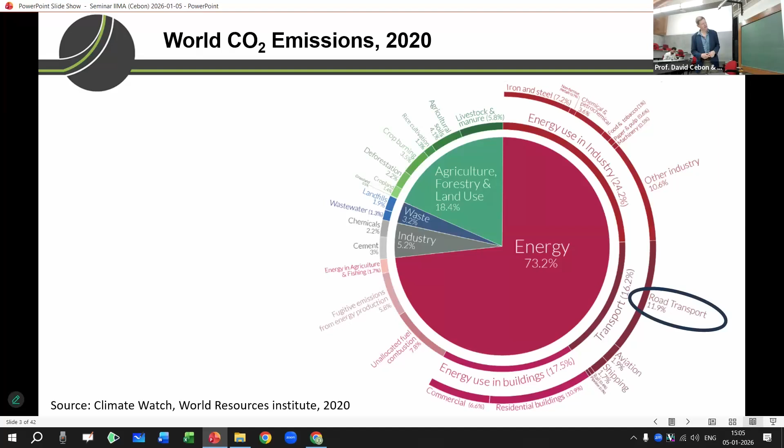Just a bit of perspective here. This is world carbon emissions in 2020. The little bit at the bottom, 11% of world carbon emissions, is road transport, and about half of that is from road freight. So emissions from road freight are about 5%. But it's increasing as other sectors decarbonise, and as the amount of economic activity in the world increases, more freight travels around; they're pretty closely correlated. So we've got an increasing amount of road freight, other sectors are decarbonising, and so we're going from 5% to maybe 10% by 2050 or more.

70 to 90% of businesses in the road freight industry are small businesses, maybe 5 trucks or less, family-owned businesses. Some are bigger, but a large proportion are small companies, and those companies have specific challenges, and particularly they have low operating margins, typically 3%, maybe 5% if they're doing very well.

And those small companies have very little resources and expertise to put into decarbonisation; their problem is survival today. It's not how do we decarbonise in 10 years' time. So it's very challenging to decarbonise the industry simply from this organisational point of view, that you've got lots and lots of very small companies that are not really interested in decarbonisation. They make up the majority of the industry, and they have limited resources. So that's a particularly challenging problem that we've got.

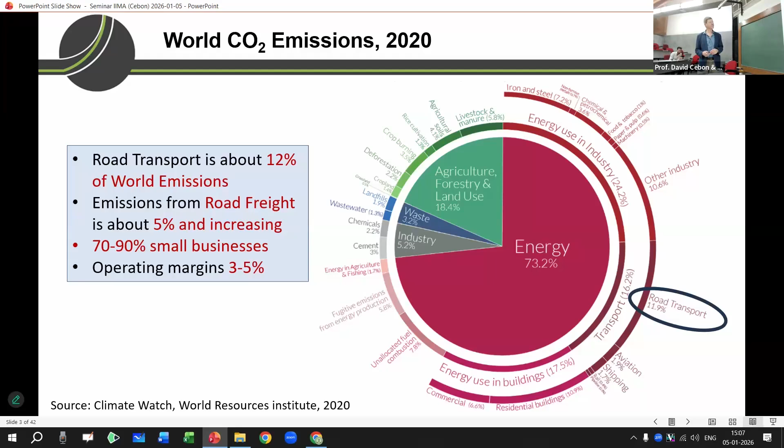So in terms of the low-hanging fruit, we can start with the easy engineering things. And we've been doing these things in the UK for some years, and some of this work happens in India as well. There's vehicle things like the aerodynamics and the tyres and making the vehicles lighter and so on. Driver performance is very important and shouldn't be underestimated. It can make a difference of maybe 15% of fuel consumption. So if you can have better drivers, you can reduce carbon emissions by 15%, which is a lot.

Higher capacity vehicles are very important in general. The bigger the vehicles are, the more payload they can carry for lower carbon emissions. There's a whole lot of logistics factors, of course, as well. And they come from things like collaboration between companies, sharing information. Logistics is very much an information industry, and by improving use of information, we can reduce empty running and reduce emissions. Relaxing time constraints, which are very important in the European context, improving vehicle fill, making sure all trucks are full as much of the time as possible.

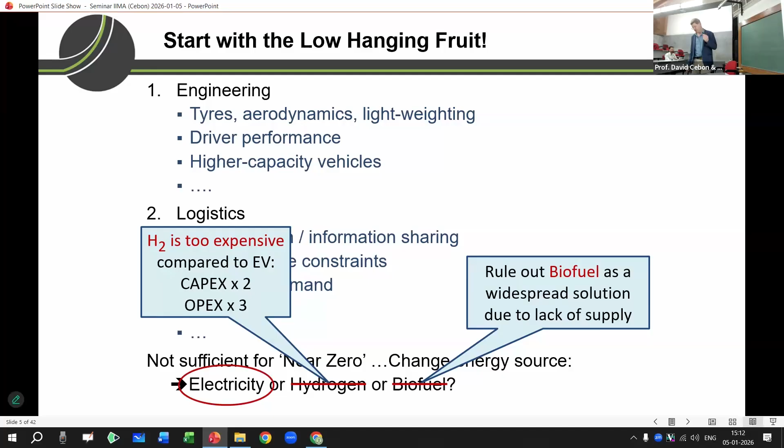So when we think about urban freight, this is a cartoon of the road network in the UK. So those roads are motorways.

On the motorways are these big blobs, which are distribution centers, large logistics facilities, which are very important, and they tend to be located near to key nodes of the motorway network. At the ends of these roads are cities, and this is very schematic, but on the edges of cities are distribution centers, large supermarkets, urban consolidation centers. They all live on the edge, or they can live on the edge of the city.

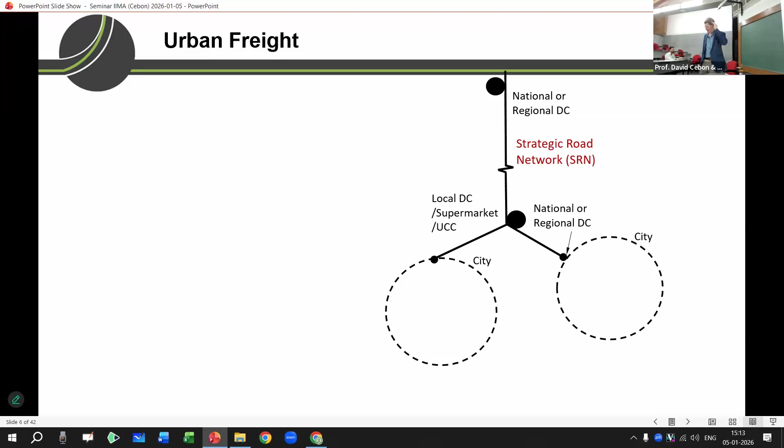And so we can, in a way, divide transport by what goes up and down the motorways and what goes into the cities. Because in the cities, you can charge vehicles overnight at hubs on the edge of town. You can do multi-drop deliveries around the town through the day, delivering parcels or delivering food to convenience stores and city centre shops. You can transport rubbish, collect rubbish, and multi-drop and drop rubbish at refuse collection points.

Now, all of this can be done by electric vehicles. It's all pretty straightforward. The vehicles can, and also buses and those kinds of passenger service vehicles as well. They can charge overnight. They can multi-drop during the day. Sometimes they can charge at charging points within the city. But overall, this is a done thing. I think the problem is solved. It's rolling out now, and it's building the technologies and supply chains for higher capacity vehicles for the future.

So we'll look back in another 10 years and this will be done, and we'll say, why did we ever have those smelly, dirty diesel trucks, noisy diesels in our city centres, making all that pollution and so on. So I think this is going to happen. I'm sure that there's elements of this happening in India now. I know there's a lot of electric buses, for example, and I suspect that this, particularly because of air quality problems, it's air quality problems which has driven this over the last 10 years. And I think you've got similar air quality problems in India, and it's quite likely that that will be a driver of this kind of change as well. So we see that happening.

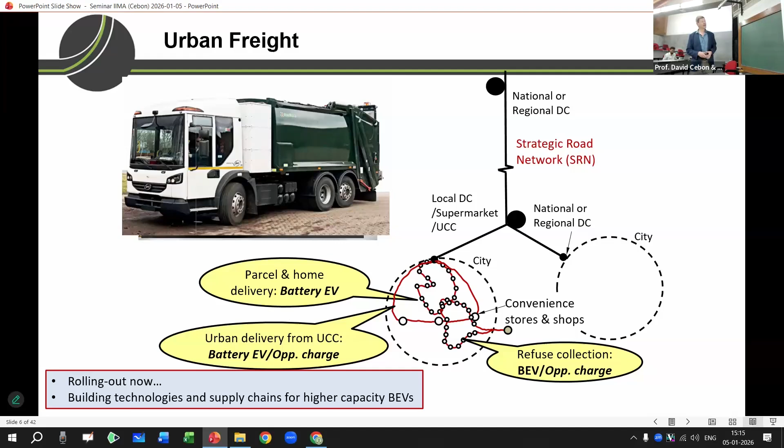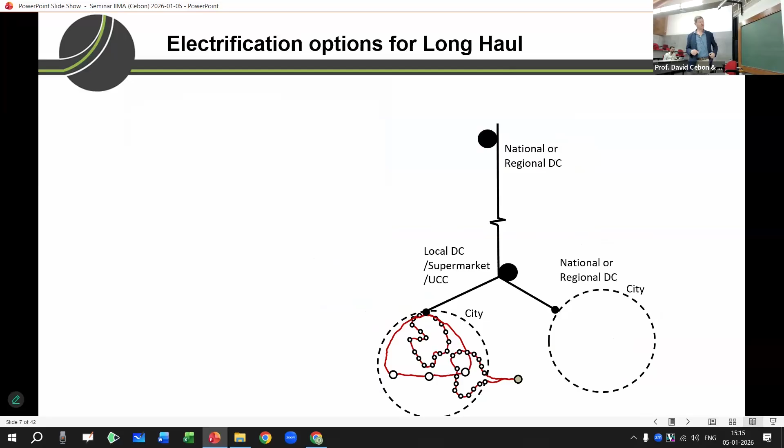It's a difficult thing to make money on. Truck drivers don't buy much coffee. They only have one driver in each one of these trucks. They take up the space of 10 cars, and they're sitting there on that piece of land for an hour. And so you have to pay for the land and the electricity and the whole facility, and you're not selling much coffee. So compared to providing diesel, which is quick and doesn't take up the land, and you don't have the throughput, this is a much more difficult thing to make work as a business model.

There's other problems with it as well, though, and one of the problems, of course, with trucking is that it needs to be very reliable. You need to be able to charge very reliably, because if you can't, then you delay the vehicles and they miss their time slot, and they have a narrow time slot, maybe an hour, when they have to arrive with their load. And if they don't get there in that hour, then they miss the time slot and they have to come back some other time, and that messes everything up.

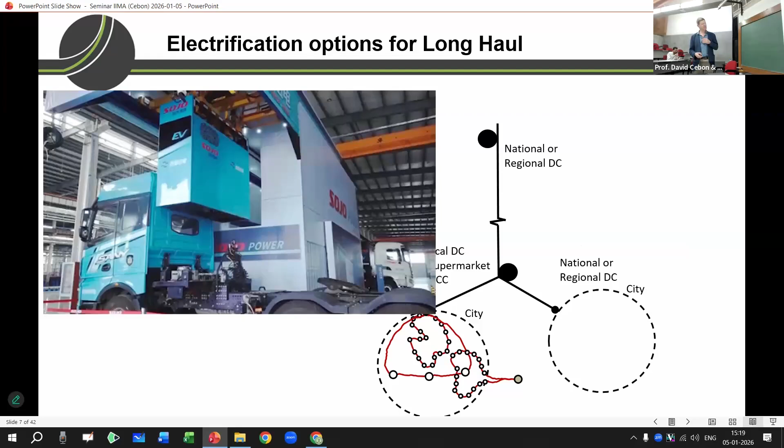These vehicles have a battery, so that when the vehicle leaves the motorway, it can drop the pantograph and drive to the distribution center with a small battery. It doesn't need a very big battery at all. So it just needs a rather lightweight mechanism on top of the vehicle and a small battery. And this is a very efficient way, and we'll talk a bit more about that.

We sometimes call this ERS, Electric Road System. ERS is an acronym that you'll hear. So, dynamic charging, electric road system. Yeah. This is another version of the same thing.

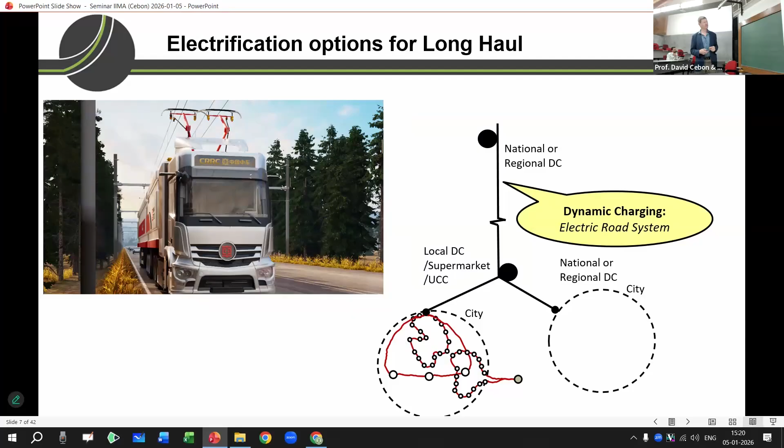An advantage of this system, of course, is that you don't have to be 5 meters tall to pick up your electricity. So if you want to charge a car or a van, then you could do it this way as well, not just trucks, and that changes the economics a bit.

So I said there are three problems with electrification, three barriers to electrification. The first two are on this slide. The first is what I call a mass penalty. So in the UK, about a third of trucks carry heavy loads. And by that, I mean they carry liquids or bulk cement or bulk food, steel or aggregate, heavy loads, right? Only a third of trucks in the UK carry those heavy loads.

The other 2/3 carry washing machines and sofas and clothes and cornflakes and potato crisps, lightweight things. So 2/3 of vehicles are volume limited, 1/3 are mass limited. For the mass limited vehicles, electric vehicles are a problem. And here's the statistics for the UK.

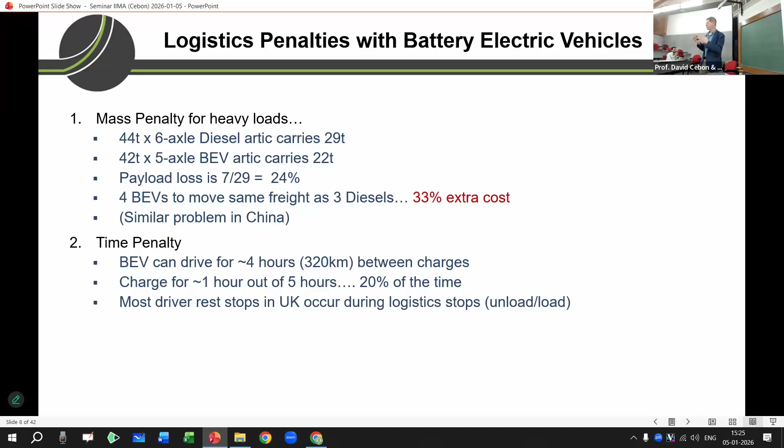So mostly, the companies arrange it so that they don't stop vehicles out in the middle of motorway services on the highway, but they've got a security problem there, of somebody tampering with the vehicle, and they've got a loss of control of what's going on. If the driver stops at that point, they're going to add another hour to their journey. So you really don't want to do that. We schedule logistics so that the stops occur during logistics stops.

So what that means is that you either have to charge the vehicle during the stops at the logistics facilities, and that means the grid connection, the electricity connection at the logistics facility, has to be substantial because you've got to charge all the trucks, right? Or you have to take an extra stop at a public charging point, which will cost 20% more because you're adding 20% to your logistics day. You've got to have 20% more vehicles to deliver the same stuff.

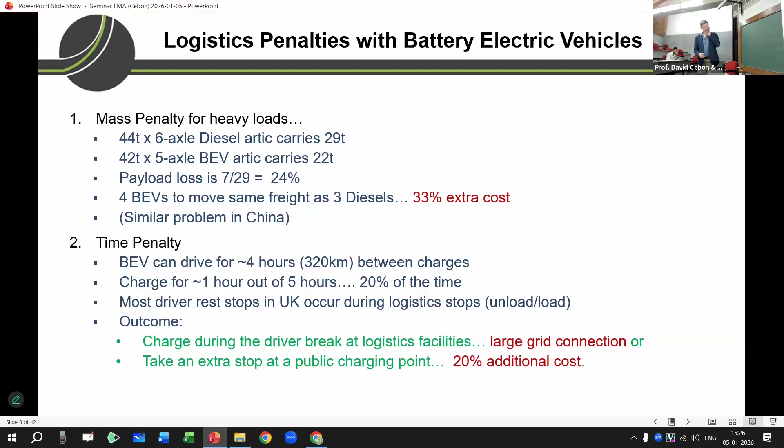So they're the problems. You're either going to have a large grid connection or you've got this time penalty of 20% additional cost. Okay, so what is the alternative? So they're the three things: the mass penalty, the time penalty, and the problem of providing charging in logistics facilities.

Now, it's interesting to think about two systems at once. We can think about the static charging system that I've been talking about. We can also think about dynamic charging at the same time because they're really the same thing. The reason that they're the same thing is this. When you have a dynamic charging system, and here is a diagram of what it might look like in the UK, then you're going to have places like up here where you've got no dynamic charging because you can only afford to put dynamic charging on roads which have got lots of trucks.

Because when you've got lots of trucks, you can sell lots of electricity and you can pay your investors back on the revenue that you're generating from electricity sales. So you can only do that if you have enough trucks on the road. If you don't have enough trucks, you can't possibly afford to put a dynamic charging system on it. So you find the most heavily trafficked roads, and these are the ones in the UK, and there are places where vehicles are going to have to go on batteries. They've got some sort of radius of activity, and they'll have to have some static charging there. And of course, there's not just one of those, there's lots of those places around the country.

And so even if you have dynamic charging, you still have to have some amount of static chargers around the country. So there's an interesting question of how much dynamic charging you have and how much static charging you have.

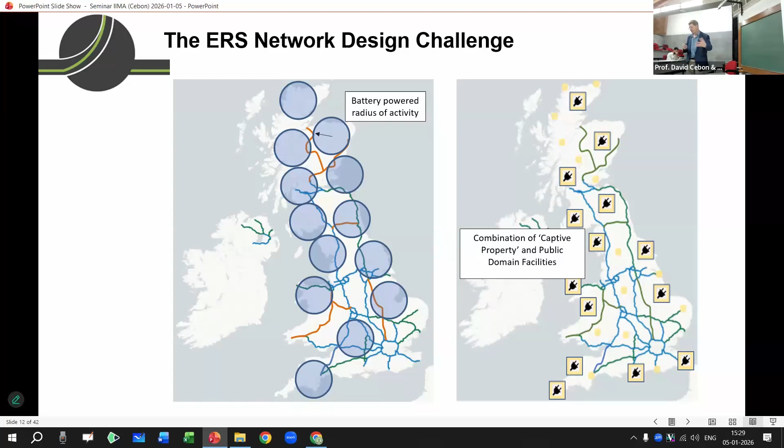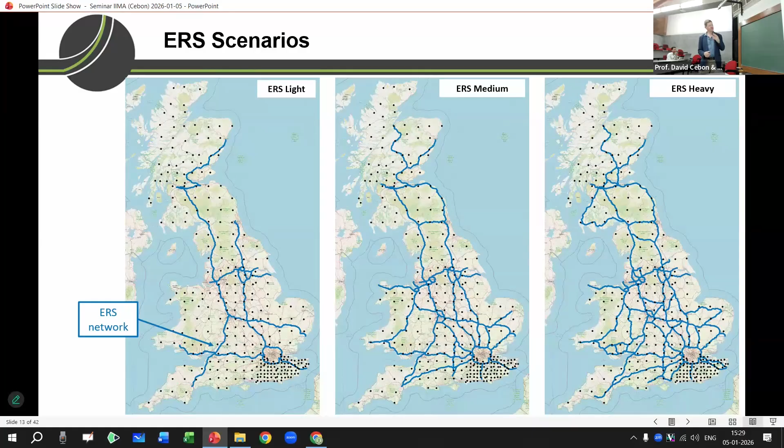So here's one way to do that. Here's three different dynamic charging systems, what we call light, medium, and heavy. This has got the smallest number of dynamic charging roads, this has got a bit more, and this has got even more, and there's static charging as well. And we can collect logistics data from our industry partners about the journeys that they're running, and we can simulate those journeys and think about what electricity would be used on such a journey.

So here is the journey. The black line is the speed profile measured with a telematics system. The red line is the elevation, going up and down hills. So this is 16 hours, two driver shifts. And then this is the battery. The battery starts off full and then it empties out. Then at this point, there's a drop off and the battery stays still while the vehicle's stationary. Then it runs out a bit more, and then it charges here at a rest stop and so on.

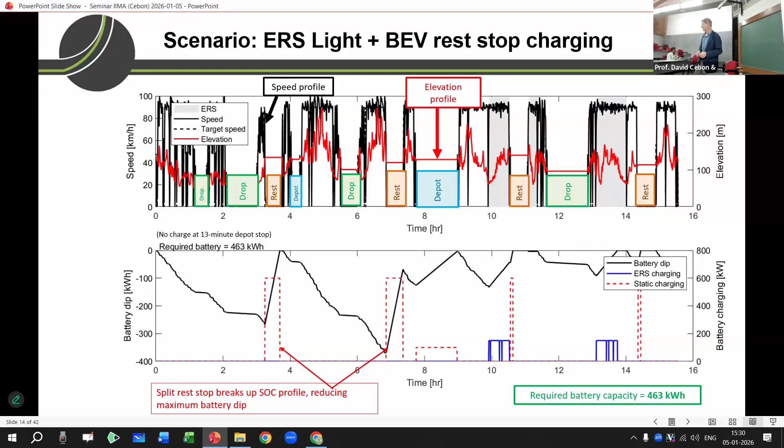And we can see here that the maximum size of this battery is about 400 kilowatt hours. That's what you'd need to do this journey. So we can look at any journey that we get from telematics data from one of our industry partners, assume a set of charging arrangements, and calculate how big a battery you would need for that journey. So when you do that, here's what you get.

So here's one journey from one of our partners, called Operator H, and this is London here, in the south of England. London has a ring road, the M25, that goes around it, and this is the top of that. The journey starts here, goes out to the west and does a drop off. Then it comes back to the depot, goes down to the south and does a drop off, comes back to the depot, then goes all the way up here, does a drop off, and comes back again. All that takes 18 hours. So this is 18 hours in the life of one truck.

And Operator H said to me, "You're talking about electric vehicles. This is what we have to do. How are you going to do that with an electric vehicle?" Okay, so let's look at the possibilities. If we charged that electric vehicle overnight in the depot at this red point here, and then wanted it to drive all day, 18 hours, then it would need a 1,666 kilowatt hour battery, 1.7 megawatt hour battery.

The biggest battery you can buy in a truck today is 600 kilowatt hours. So this is about 3 times bigger than any battery you can buy in a truck. So that's clearly not going to happen, at least not for some years until batteries are a lot better than they are today. It can't happen today.

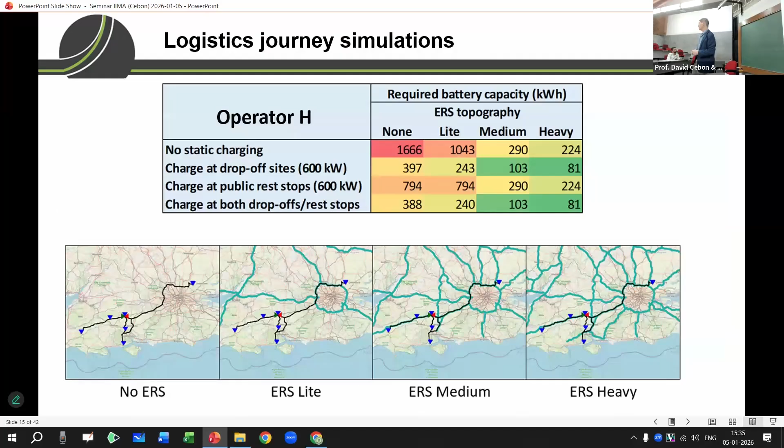And all of those 3 penalties, the time penalty, the weight penalty, and the electricity connection problem, they all go away. And I'll explain about the electricity connection problem now. The electricity connection problem is that if we're going to do this stuff, charging at these points, we've got to have a warehouse like the one I showed with lots and lots of trucks lined up, and it has to have a big enough electricity connection to power all those trucks. And that may be a very big electricity connection, really big enough to power a town. So how many of those do we really need?

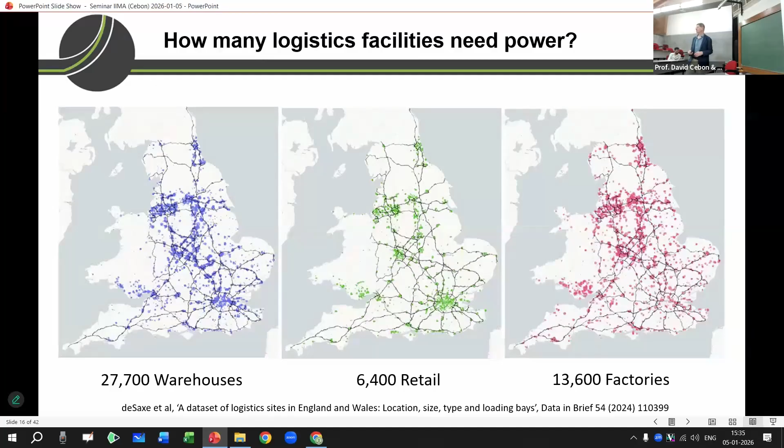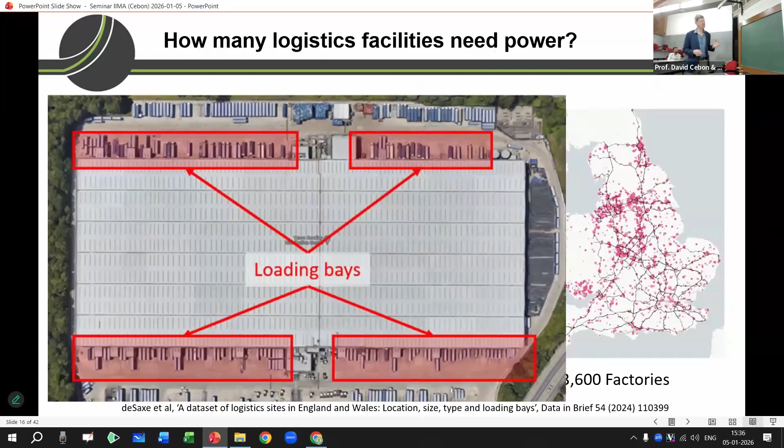And from the database of commercial properties, which is a government database, we can find out the area of this building and its GPS location. So we know how big it is, and we know its location. And we can look at similar buildings again with Google Earth, and you can count loading bays, right? We can count how many are on this. So if you go to 50 different logistics facilities or something, you can count how many loading bays they've got.

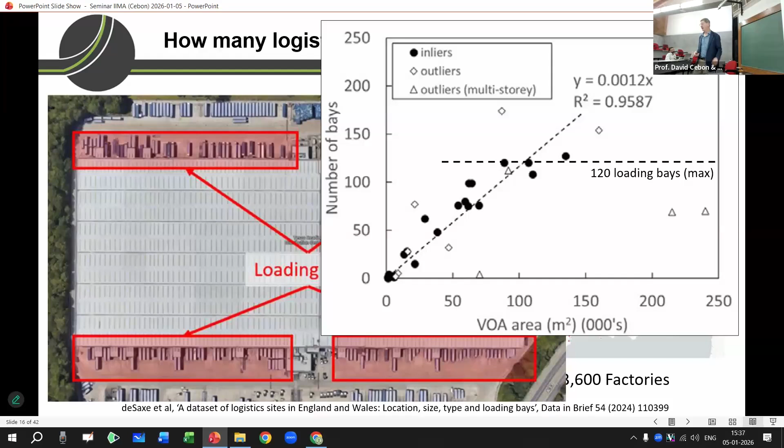Now we can make some assumptions about how much time vehicles spend charging and how much each loading bay is being used. And when you do that, our estimate is that there's about 10,000 facilities in the UK that are greater than 2,000 square metres. That's the size where we think they'll need a significant grid connection. And when you look at the electricity requirements, it's somewhere between 4 and 20 megawatts in those locations. So 10,000 locations where we need 4 to 20 megawatts.

Now, if you actually go and try and ask the electricity company for a grid connection of 20 megawatts, they'll say, don't be ridiculous, because it's such an enormous connection. You know, you can power half of Ahmedabad on 20 megawatts. But even 4 megawatts is a huge amount of electricity.

So what we're talking about here is 10,000 places around the country where the owner has got to put in a big electricity connection in order to charge trucks, and they're probably someone else's trucks. The person that owns the warehouse probably isn't the person that is driving the trucks. So out of the goodness of their hearts, some 2,000, 3,000, 5,000 different companies have got to go and spend millions of pounds to put sufficient electricity into 10,000 warehouses. This is a very big problem.

Right, there's a queue for electricity connections that's 15 years long in the UK at the moment. In some places, not 15 years long everywhere, but in some places 15 years long. So just simply putting electricity connections in to solve this problem is just enormously challenging. And I suspect it's probably just the same in India.

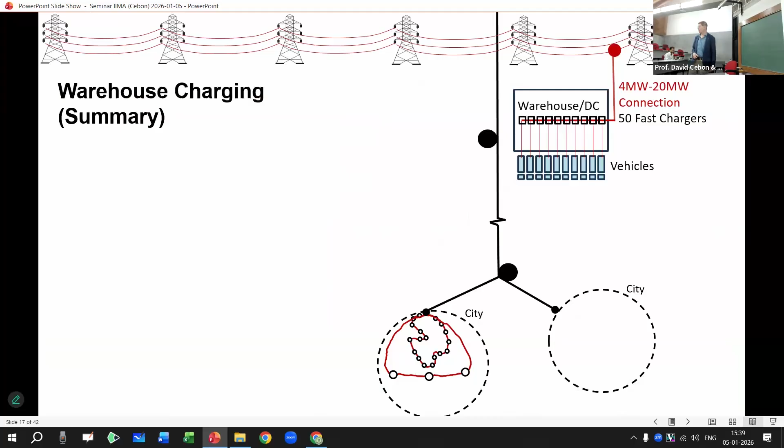So this is a summary of the warehouse charging, right? If we do warehouse charging, we've got to make a grid connection. Here's a picture of our warehouse with all the trucks lined up out the front. It's got a 4 to 20 megawatt connection, maybe 50 fast chargers in it. And every one of our warehouses has got to have a similar kind of connection, right? So there's lots of these, 10,000 of them around the country. They're not all as big, but there are many big ones.

You've got a reduced payload. You've got the mass penalty that comes with it. And you've got something between 10 and 25% more trucks as a result of the mass penalty that you are suffering there. So this is not great. It's not a great picture.

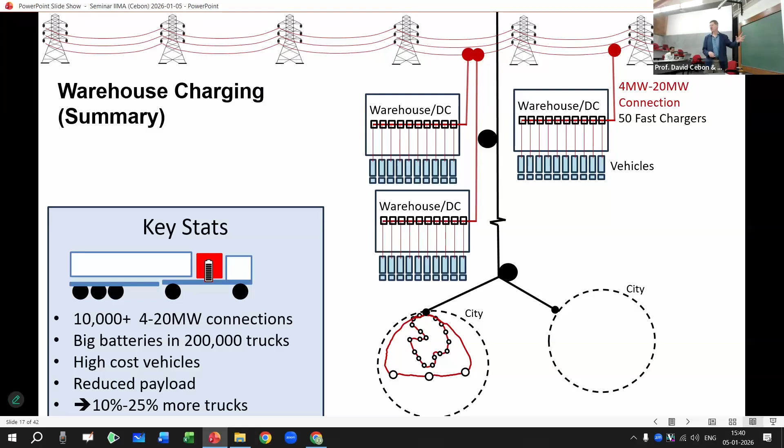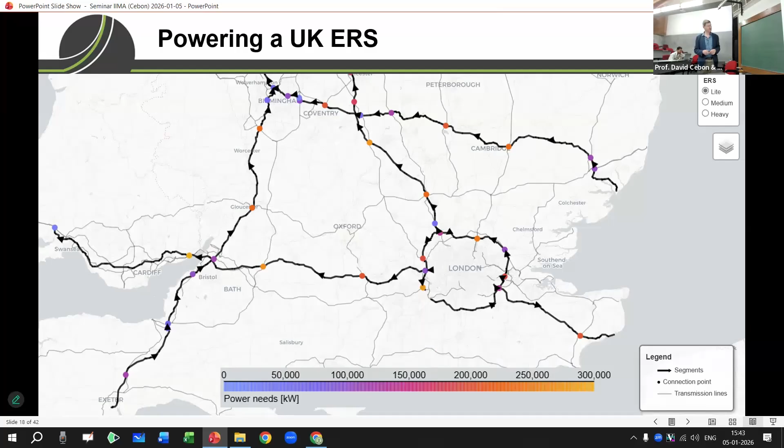So instead of 10,000 electricity connections, we need about 60, plus a small number of static charging connections. So that's a much easier problem to solve. That's a centralizable problem, and it can be solved in one go by private industry or by government. So where we end up with this is you have one big grid connection like that.

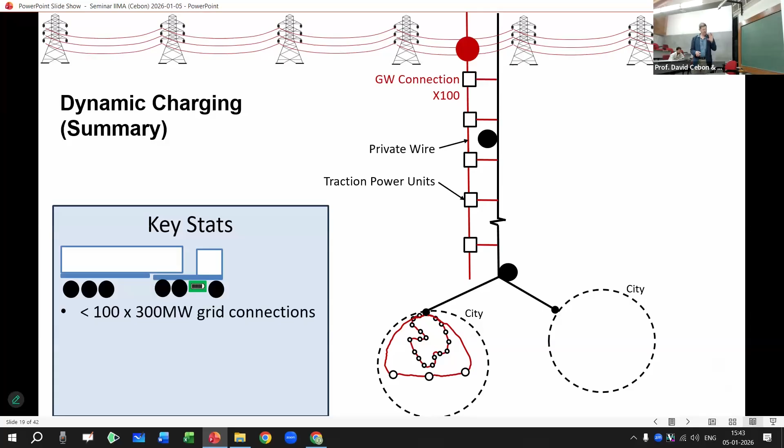There's maybe 50 or 100 of them in the country, and they power a wire which goes along the motorway, and you have these what are called traction power units which feed in to the motorway and connect to the dynamic charging system. So a much smaller number of grid connections, less than 100, of up to 300 megawatts. So they're much bigger connections, but there's a small number of them, and they're localized.

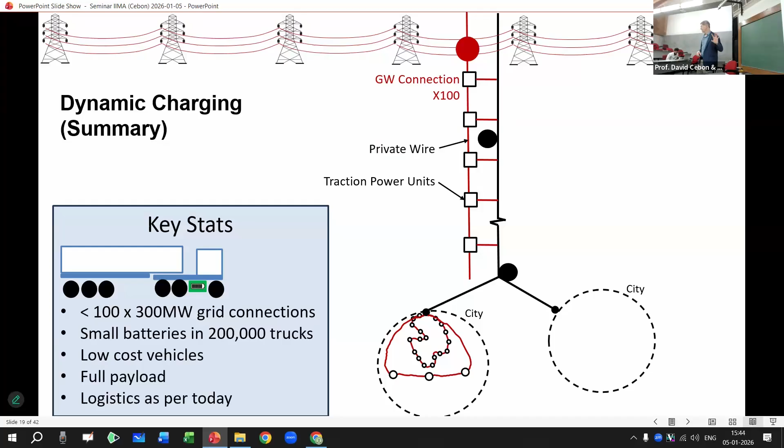You have small batteries in 200,000 trucks. So all these trucks now have small batteries. You have low-cost vehicles as a result. They can carry a full payload, so you don't have any mass penalty, you don't have any time penalty, and so you do logistics as per today. So this has everything going for it. Everything going for it as a strategy, including the cost.

And just very quickly, this is the total cost of ownership. Parth will show you some better graphics in a minute, but this is from 2030 to 2050. Total cost of ownership in the 6-year first life of the truck. So we buy a truck, we run it for 6 years, we sell it, subtract one from the other, add the energy cost, but not the driver cost. Driver cost not added, and that will be about £400,000 for a diesel truck.

So there's a diesel. We don't know what's going to happen to diesel fuel and the cost of diesel fuel in future. We're just going to assume it's constant because it might go up and it might go down. We really don't know. So that's the total cost of ownership of the diesel with time. This is a hydrogen fuel cell vehicle, which is way too expensive and will never catch up. This is a 1,200 kilowatt hour, 1.2 megawatt hour battery, probably won't catch up with diesel either. This is the rate at which we think battery costs and vehicle costs will come down.

And these are ERS vehicles. Here is a 300 kilowatt hour ERS vehicle. You can see that from 2030 onwards, it would essentially be cheaper than the diesel vehicle to run already. So importantly, if transport costs more than diesel to run, somebody has to pay for that. It can't be the logistics operator. The logistics operator's only got 5% to work with, so they're not going to pay double for the cost of logistics. So that ultimately has got to be the taxpayer, the government, the consumer. The public, either through their taxes or through some other mechanism, have to pay for this.

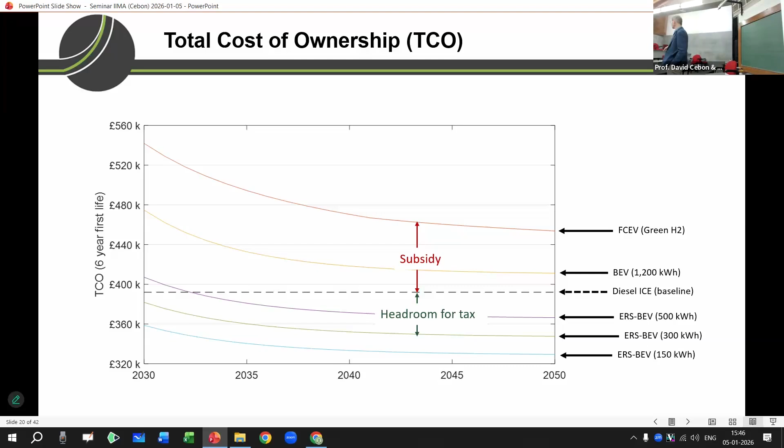Alternatively, if you can go cheaper than diesel, then that gives you a bit of headroom that you can charge a bit of tax. You can tax the heavy vehicle industry without changing their profit margin. Their profit margin is the same at this point along here. So you can collect some tax. And of course, at the moment, the UK government collects a lot of tax from diesel fuel duty. And that's going away, and they've got a bit of a problem. What are they going to do? Where are they going to get that tax from in the electric vehicle world? So because these vehicles are more efficient, they give you headroom for tax. We think they'll be cheaper than diesels to run.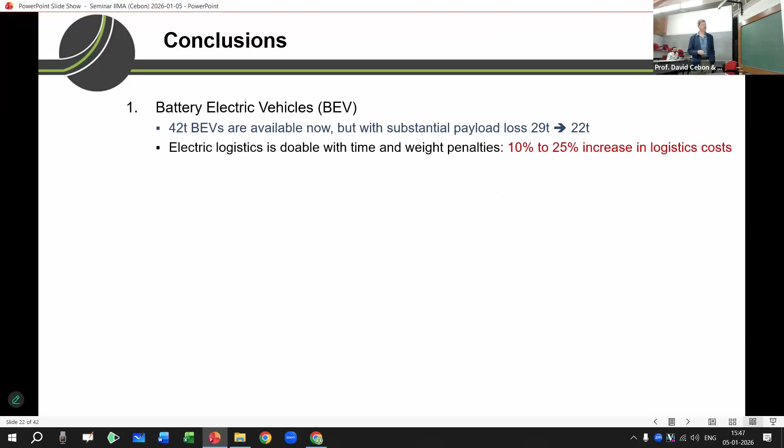Truck stop charging is necessary, but is not nearly sufficient. Our government at the moment thinks that it just puts in some truck stop chargers and that solves the problem. There's no way it will solve the problem. You need to have some. When vehicles get into trouble, they need to be able to charge somewhere, but it's not going to be the main method for charging. Warehouse charging is essential for reasonable journey costs. We will have to have charging in warehouses.

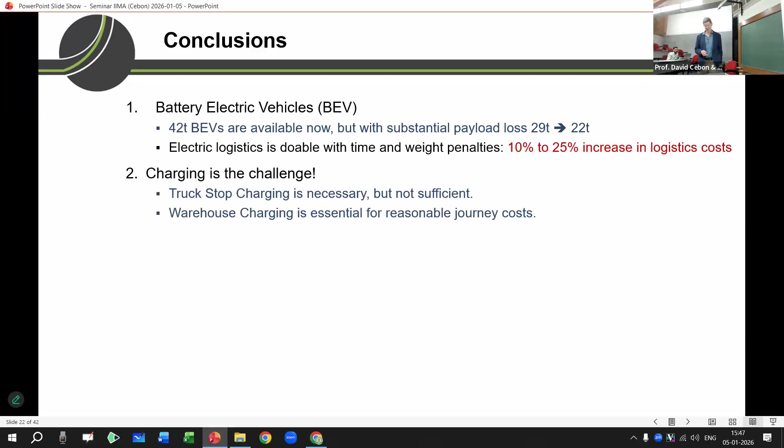You need about 10,000 electricity connections if you're just going to do static charging, if you're not going to have any dynamic charging. And that is very challenging and is a potential blocker. It potentially can stop the whole thing from happening. The combination of electric vehicles and an electric road system is the lowest cost, the lowest carbon, and the lowest weight. It reduces battery size by somewhere between a factor of 2 and 4, which is substantial. It eliminates loss of payload for mass-limited trucks, which is 60% of them in India.

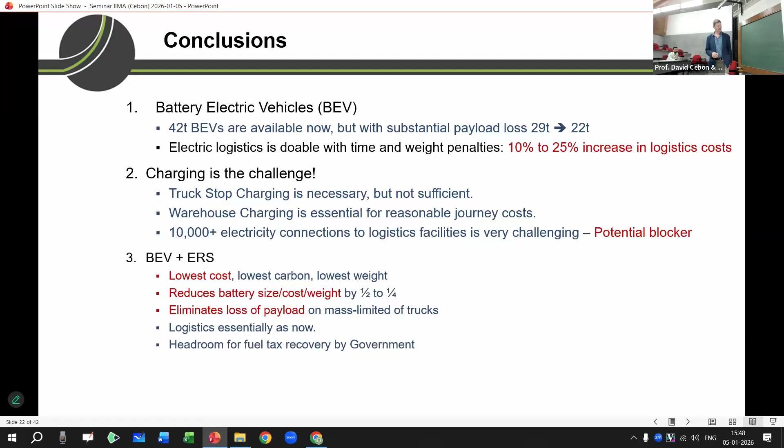Logistics is essentially as now. You don't have to worry about charging time. There's headroom for tax recovery by the government, and it eliminates most static charging and about 10,000 large grid connections. And just one final thing to say, and that is that these cost penalties must be overcome. They have to be overcome for widespread rollout of electric vehicles. If we can't get those penalties to zero, the fleet operators simply won't buy electric vehicles. They'll keep running diesels, and the electric transition won't happen.

If we want the transition to happen, these penalties, the mass penalty and the time penalty and the grid connection problem, these three problems have to be solved. Otherwise, there's no transition. So that's where I'll end up. Just one more. Solving this problem, it's not a logistics problem. It's not a vehicle technology problem. It's not an energy problem. It's all of them mixed together. If you want to tackle this problem, you have to have a multidisciplinary team with energy people, with vehicle people, and with logistics people. That's the only way to solve this problem.

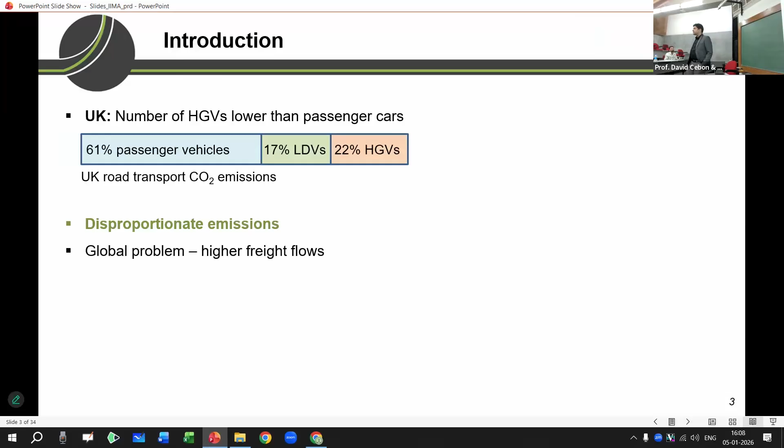And it's not just a UK problem, but a global problem. We can see that based on the growth in road freight over the years. In countries like China, India, and so on, road freight has gone up. In a few other countries, it's gone down slightly, maybe because manufacturing locations are shifting to countries like India and China.

So we need solutions that work globally, because currently there's a one-fits-all solution: everyone uses diesel trucks in all countries. We need a solution based on electrification that can solve the blockers and work globally. Is this actually possible? Well, we can only try to find out. So in this presentation we build some techno-economic models to try and answer a few of the questions, taking the blockers into consideration.

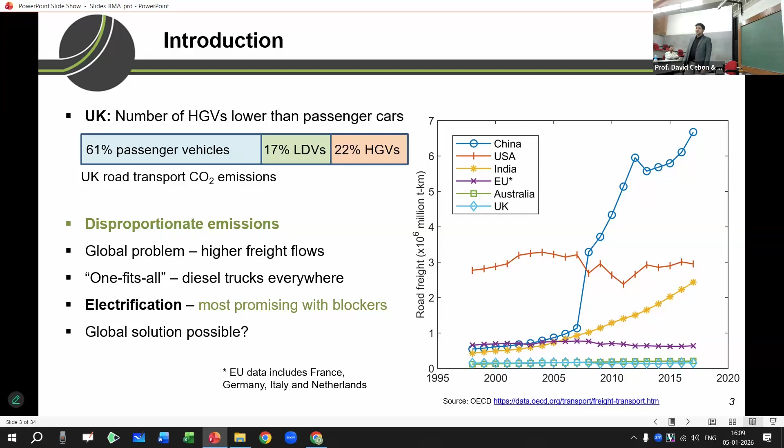So what are the blockers? Just to recap, one was the grid connections. They're expensive and complex, and there is a backlog in several countries. The other was the charging downtime penalty. We need to stop and charge, which costs money, not just in driver costs and vehicles, but also freight delays, and there may be penalties. And the third one was the payload penalty.

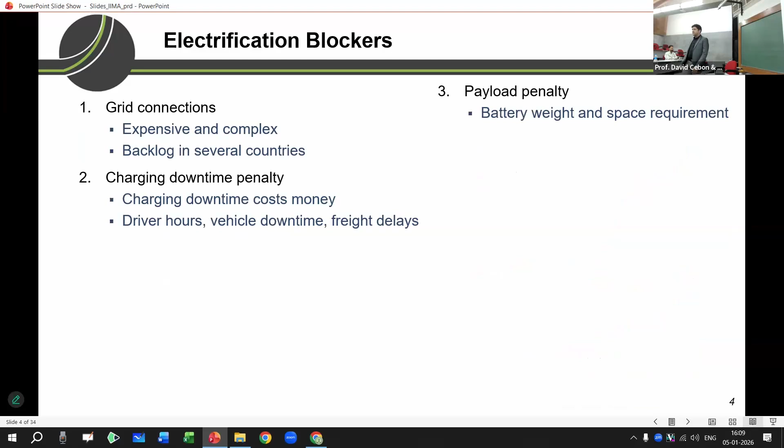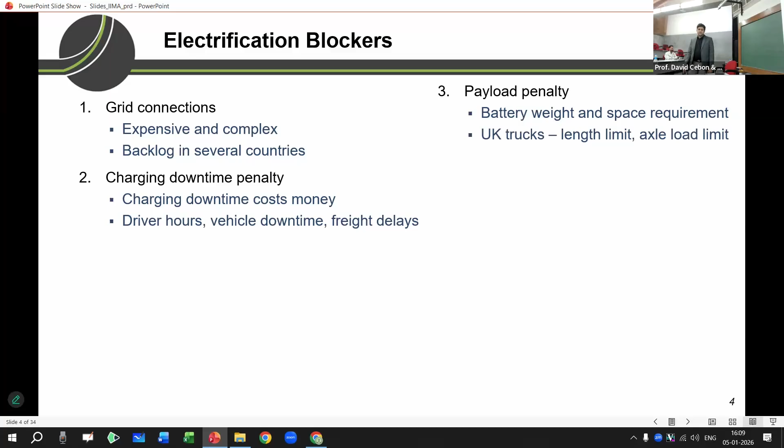As David mentioned, the batteries need some space and have a certain mass, so we have a payload capacity loss in the truck. That's because of regulations on the total length of the truck and the loading on the axles. For example, here is a standard 3-axle diesel tractor unit sold in the UK. It can carry a trailer with a payload of 29 tons.

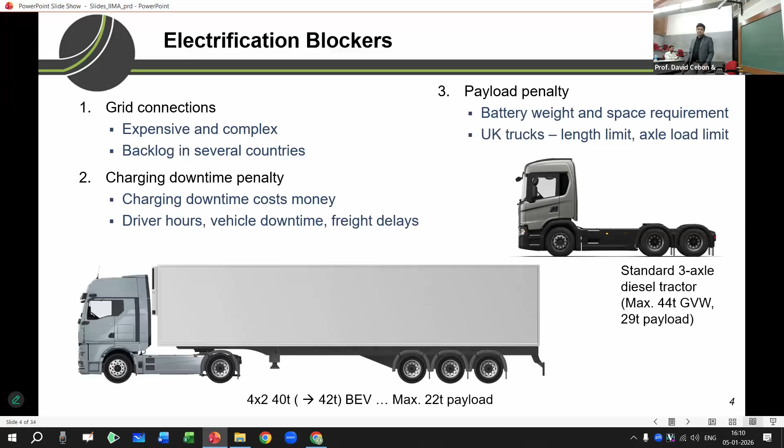Whereas a comparable battery electric vehicle can only carry 22 tons. So it's one category lower than this one because it has a missing axle. And the space that was taken up by that axle is now being taken up by the battery. So that's where the batteries are located for the electric trucks.

And also, you can't just extend these to the back and have a battery there, because the total length of the truck is limited to 16.5 meters in the UK. So there's no possibility of doing that. You're stuck with this one.

So also in terms of the options, we saw that obviously static charging has to be a primary solution. You still need chargers no matter what you do. That's similar to what David showed us, a static charging site. You need that in lots of logistics facilities. Could do battery swapping, which can save time, but it can have queuing issues, and that's something I'll discuss in a bit more detail in a bit of time.

There's also issues surrounding interoperability because when we talk to OEMs, they don't want their batteries being swapped with other OEM batteries because they maintain the secrets. You have the coolant in the battery that's specific to an OEM, they design the formula, and you don't want mixing happening. And they're expensive and complex. I'll show you some costs of these stations. They're super expensive, super complex to build.

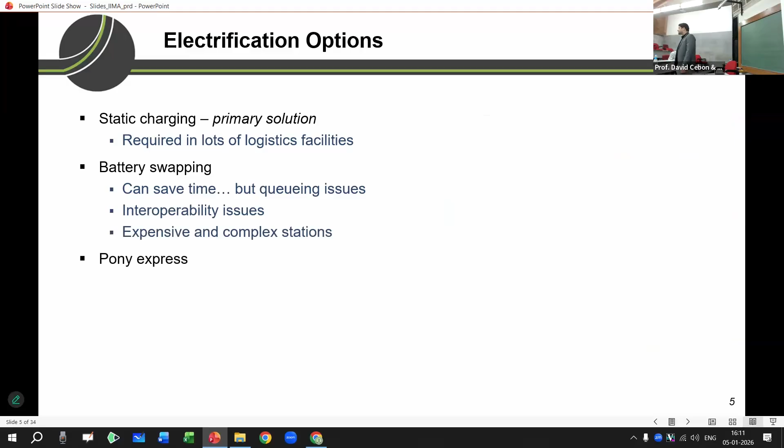There's something new here. I call it Pony Express, which is quite funny. So instead of swapping the battery, what if we just swap the entire tractor unit out? When you run out of battery, park the tractor unit, take a new one out, and then be on your way. Now, it sounds that it might be more expensive. It doesn't sound quite right, but I'll show you why it's actually better than battery swapping.

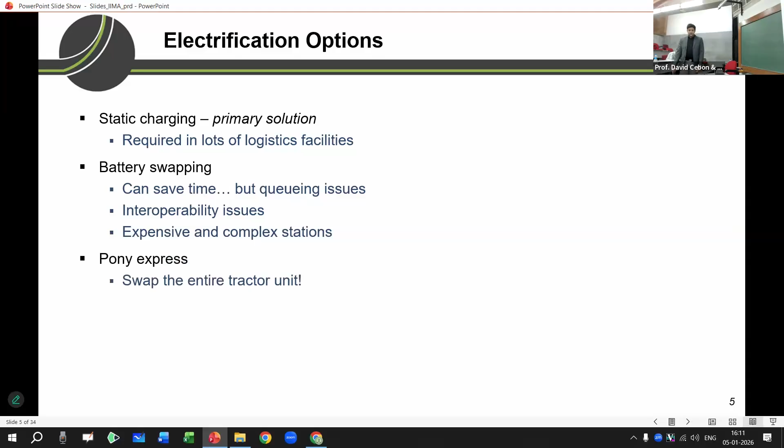And finally, electric road systems that David showed, they could be overhead ones, or they could be in-road ones, and I'll discuss those as well in a bit more detail. Of course, grid connections are a lot easier with these.

Right, so I was talking about a one-fits-all solution like diesel. Could we do something like that? There's so many different pathways that it's very hard to achieve economies of scale like we do with diesel trucks right now. So can we have a modular system that will work everywhere, and you can choose the energy source based on the requirements of logistics and so on? That's what it would look like.

The base drivetrain of the vehicle would be an electric drivetrain, and you can change the energy source based on what are the resources available. So you can have an electric drive that's powered by big batteries, and it can use static chargers or battery swapping. You can use a range extender. So what if you just remove a battery pack, add a little engine in, it becomes a hybrid vehicle, and use biofuels in cases where there's no charging available.

Or you can use electric road systems with it. You can just retrofit a pantograph or another sort of pickup and use ERS with it. So this is sort of the solution we focus on, and we try to develop models for each of these bits and compare them. To do that, there's a need to develop a simple journey model.

So obviously you have a lot of complex models. You might have studied agent-based models and the like. They're very big and complex, and it's hard to understand what's exactly going on. So we tried to develop a simple journey model to understand what is the increase in logistics time due to charging stops. So how do we quantify the charging downtime penalty?

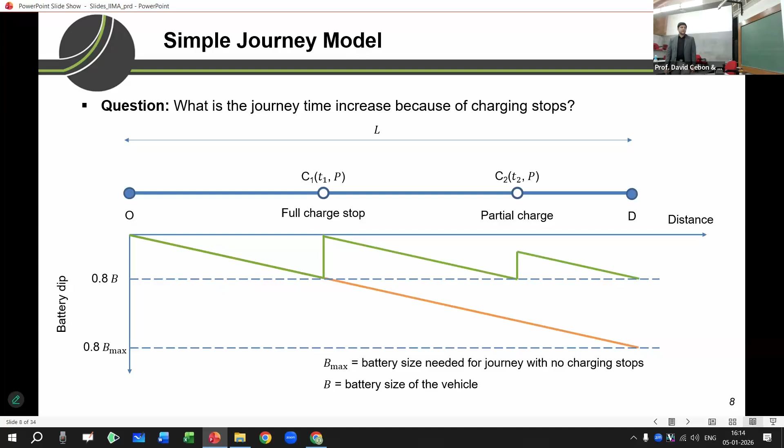They run out of battery again, and they need to add another charging stop until the last one. So in the last charging stop, you only need to charge enough to reach the destination, because otherwise you're just waiting there for no reason. And so that's the sort of model we use for calculating the time increase. Here's an example of how it works. So we call it the fundamental diagram of logistics as well.

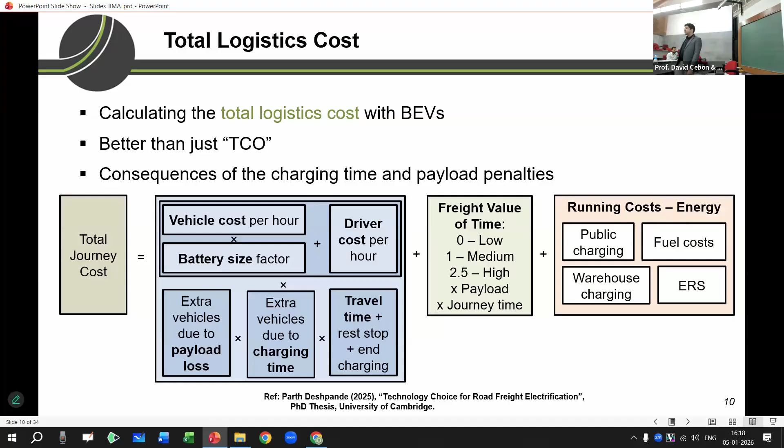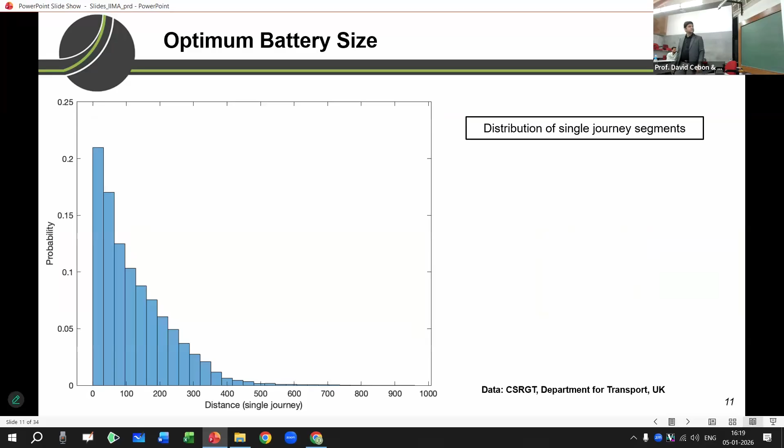How do we use it? So here's a quick example. What if we, instead of just one journey, had a distribution of journey lengths? So this is some data from the UK. We have a probability distribution of journey lengths. We can use this and run a Monte Carlo simulation to then find what is the total cost of logistics for different battery sizes. And that's what it looks like. So the x-axis is the battery size. The y-axis is the total cost. I do it per kilometer because there are journeys of different lengths.

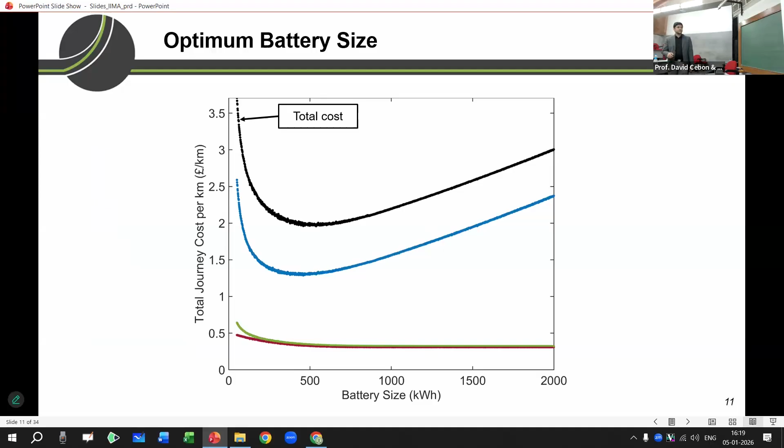That's the total cost curve added up for all these journeys. That's the components as well, just for reference. So that's the standing costs, that's the freight value of time, and the energy costs. And you see that there is an optimum there. So if you wanted a truck that could do all those journeys, what is the battery size that you would choose? Well, it's that one because that results in the lowest average cost for that sort of journeys. So this is a quick, nice and easy application of this total logistics cost.

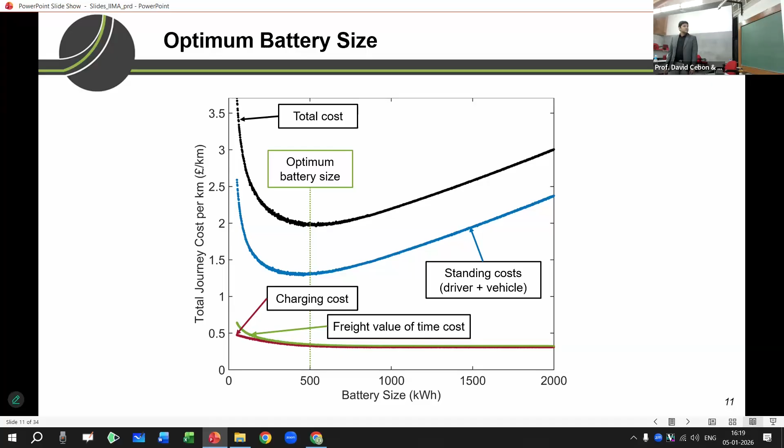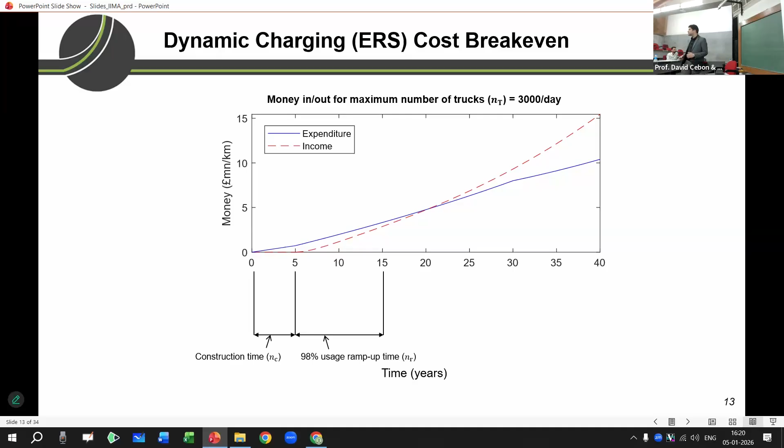We have a brief period at the start, that's 5 years, that's construction time. So during the construction time, you're installing the electric road, so there's no income, but you've started spending on it already. We assume it takes 10 years for it to reach peak usage, from no one using it to everyone using it. That's accounted for there. And then there's a commercial loan as well that we assume, and that goes off after 30 years. So this point where these two curves intersect, that's the break-even point. And that's what we focus on.

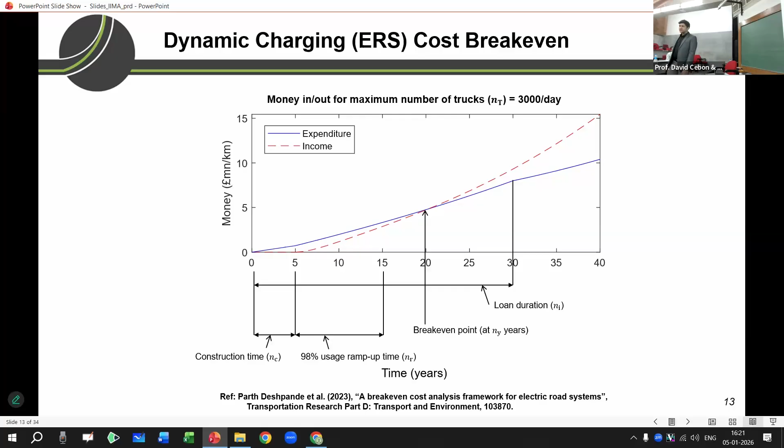We want to have returns within a certain number of years. And this is assuming that there are 3,000 trucks per day on the road. So this gives us a way to correlate the number of trucks on the road to the break-even duration and the overall economics of the electric road. So we'll use this going forward. Of course, the finance cases may be different. So I just showed you an example here, but you can vary all these parameters: the construction duration, the ramp-up duration, the break-even duration, the loan, and the interest rate.

So we have 3 different cases. Case A is the quickest return period, but it has the highest interest rate. Case B is sort of a moderate case. And when we talked with a few investors, we asked, well, would you invest in the ERS? They said, maybe. And we asked them, what would be your conditions? And they said, case B. So that's the more realistic one. Case C is the more relaxed one. So it takes you a long time to get your money back, but lower interest rates. So we'll be using these throughout the presentation for all the results. But what we can do using these is try and correlate the economics of the electric roads with the economics of the vehicle.

So I showed you 2 things. I showed you the total logistics cost, that is from the perspective of the vehicle. And I showed you the cost break-even model for the ERS, that's from the perspective of the infrastructure. Now, how do we link those?

So first, we need to make some assumptions. I assume that we use an ERS vehicle that has a 250 kilowatt-hour battery. 80% of the journey is on the ERS. So there's 10% at the start and 10% at the end that's not on the ERS. We assume that the payload requirement, the demand, is 29 tons, so that we are looking at the worst case scenario, like what if you want to carry a mass limited payload.

And the ERS sizing depends on demand. So it depends on the traffic flow. If you don't have many vehicles using it, you'll put in a smaller substation. Otherwise, you'll put a larger substation. And we include all the standing costs as well.

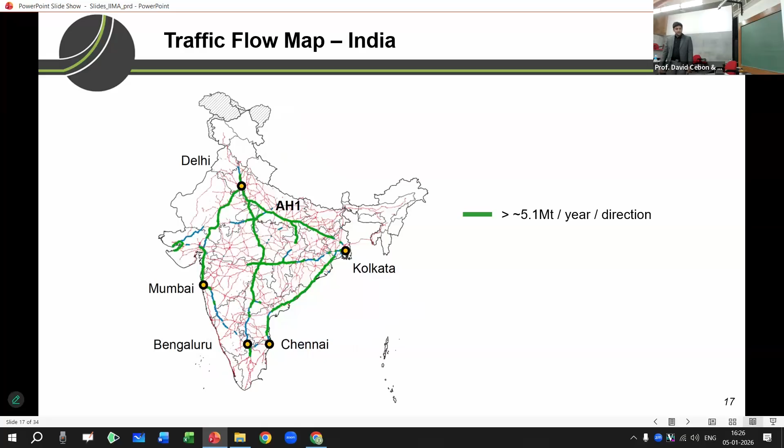Right. What if we can't have ERS? So what if we don't have more than 3,000 trucks per day on the road and we need to use static chargers? What are our options? So yeah, I'll be comparing some of these options.

Now to do that, we need to be careful in accounting for the cost of infrastructure. We think it's easy because, well, it's just the cost of one charging unit. There's two other things that are key that we try to incorporate. One is the cost of land. And to do this, I used an approach similar to the one David showed us for the warehouse, for counting the number of bays.

And if we do that, we get a nice correlation between the cost of land and the number of charging spots, and we can use that to do our calculations. The other important thing is the cost of grid connections, which are super expensive. So we used a couple of different sources for that, and we developed a model for that.

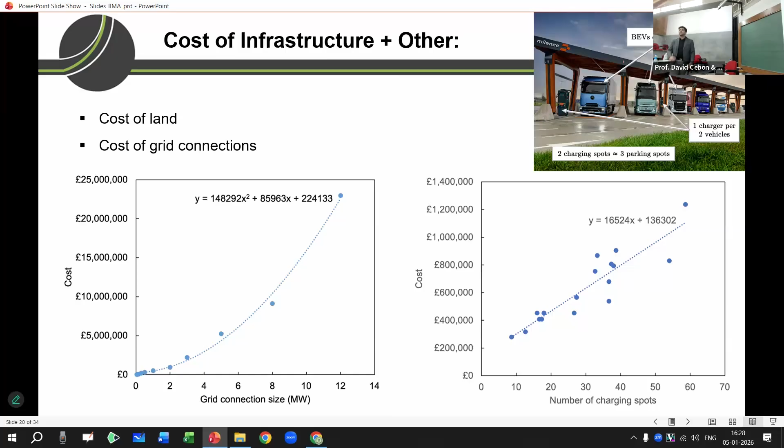You can see that it's not linear. It goes up a lot as the size of connection increases. That's because the complexity increases. You need more components, more wiring, more safety equipment, and it's complex to install. So it goes up quite a lot with large grid connections. So these are the 2 costs we use, along with obviously the cost of the charger itself and so on.

Then we did a cost break-even model, exactly the same as that for the ERS, but for static chargers. And we got some good results. So this is one of the results. If you're looking at a certain number of events per day to achieve cost break-even, we assume that each event is for a fixed amount of time. So we're looking at 3 different chargers.

If you say that they're each being used for 30 minutes at a time in an event, the economics look pretty similar because you use the faster charger for the same amount of time. It's more expensive, but you're selling more electricity in the same amount of time. So they all look almost the same.

Whereas if you look at a fixed energy usage event, so if you wanted to sell 600 kilowatt hours of energy from each charger, the economics would be vastly different, because now they're selling the same amount of energy, but the 1 megawatt charger is much more expensive than the 300 kilowatt charger. So that was one good insight that we found.

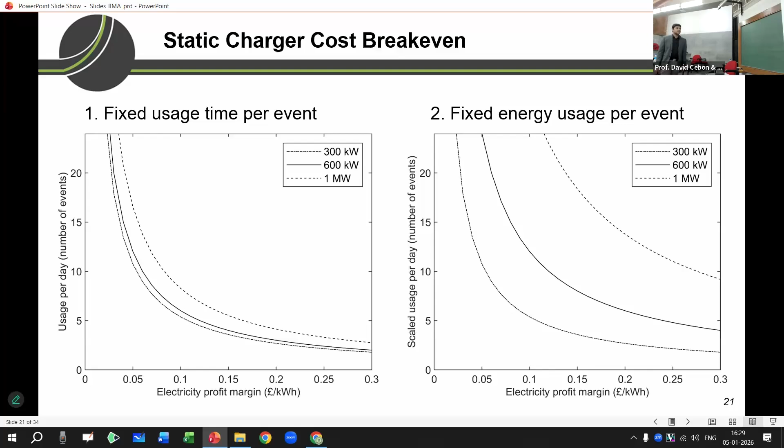And then we went back and tried to link this economic model to the vehicle costs as well. Same as the electric road systems model, we had different costs for chargers depending on the number of chargers in the set, because the size of grid connection varies and the cost of land varies as well. So that was the basis we used for calculating this and the total cost of logistics. So we get something similar to the electric road scenario.

So you could do either or. I chose to do the cost penalty. If we added a 70% cost penalty so that they intersect, we get a certain value for that, which is 17 pence per kilowatt hour.

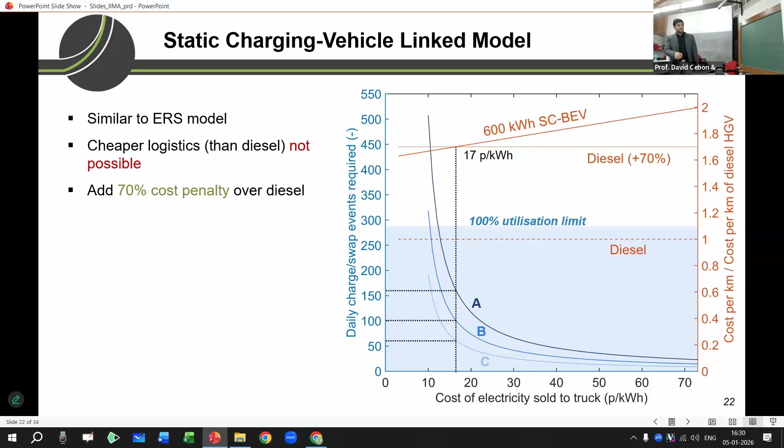And then we can go back to our finance cases and look at the daily events required for you to achieve that finance case. So we're going to keep this in mind, the number of events required for each finance case, because I'll be showing the results in comparison to the other options a bit later. But the key takeaway here is that it's not possible to do the same logistics at the same cost. And there's no room for a tax margin because, in fact, the government has to then give out a subsidy for the electric truck.

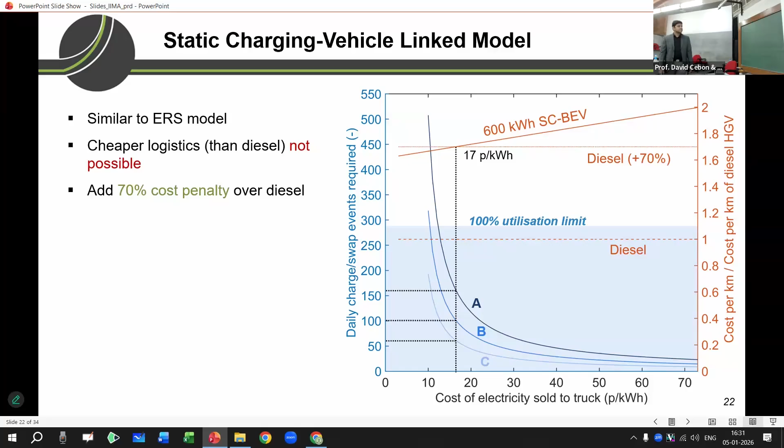We can do the same for battery swapping as well and for Pony Express. But just before that, I'll explain how we developed a sizing model for the battery swapping station. So that's what the battery swapping station looks like. Assume a hypothetical scenario where the station has 3 chargers. Let's say a battery is charged within 15 minutes and it takes 5 minutes to swap. We use this to develop a methodology for how many chargers and how many batteries should be inside the station.

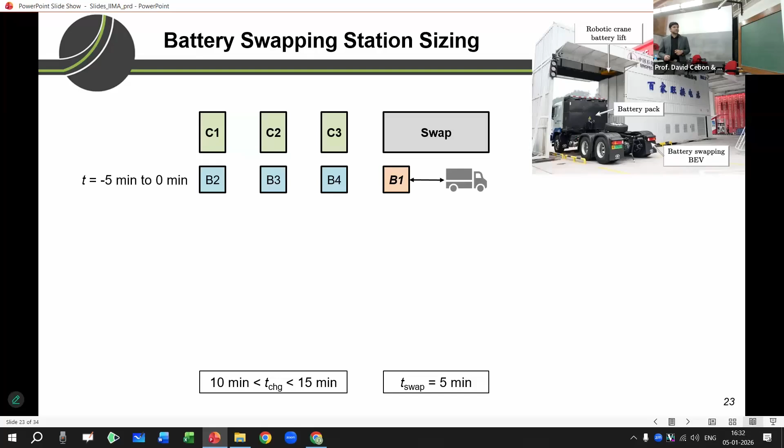So the way it works is, let's say just before t equals 0, there's a truck that has come in, it has swapped a battery. The battery is now being swapped. It's called B1, and it has to be plugged in to charge somewhere. At t equals 0, we say that, okay, there's this battery that has come in, we plug it in to charge at charger C1. Now, assuming all the others are fully charged, we take B2 out, and then there's the next truck that has come in for 5 minutes, and it's being swapped with B2.

Now, there's a new battery that has come in, B2. Let's say we put it in place of B3, take B3 out and swap it, and then so on. We do the same for B4 as well. Now, it's been 15 minutes from t equals 0, which means that B1 has fully charged up, because in this hypothetical scenario, I assume that it takes 15 minutes to charge the battery. So for the next round, we can then take B1 out. So B1 was in the station for 15 minutes of charging. It took 5 minutes to swap.

If we divide these numbers, 15 by 5, that's 3, which means that we need 3 chargers and 3 plus 1, that is 4 batteries, 4 spare batteries inside the swapping station. So you can do the same calculations for when it actually takes 1 hour to charge the battery and it takes a bit more than 5 minutes to swap. You just divide those numbers, that's the number of chargers, and plus 1 is the number of batteries you need. So that's how the full system works.

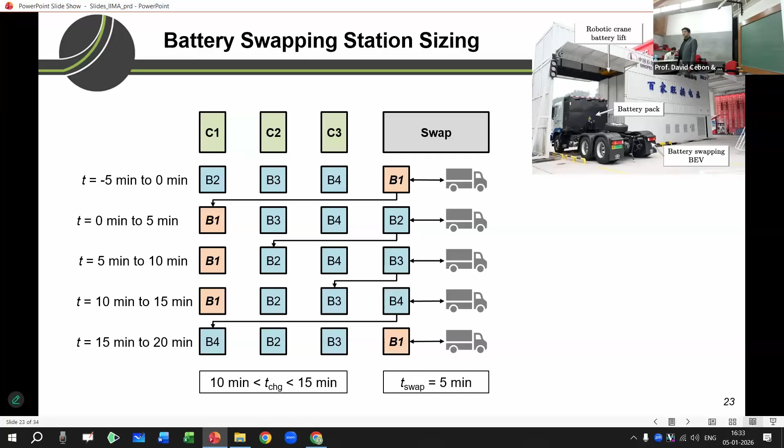Now you may think it works beautifully because it takes like 5 or 10 minutes to swap. It's much faster than charging. But there's another issue with it, which is queuing. Yeah, I'll just skip through this. Yeah, the queuing. The issue with queuing in this is that there's only one service lane. So unlike a static charging area where you have 10 different chargers ready to be used at any time, with the battery swapping station, there's just a single lane. And if you've studied queuing theory, you may realize that's a bit of an issue because that's going to result in a long queue.

If you have more vehicles coming in, they have no option but to wait. With a static charging scenario, if there's more vehicles coming in, they can just use an available charger. And so there's diminishing returns if you have a long amount of time where the station has a peak arrivals rate. So the whole point of battery swapping was that it is quicker to get energy, and you can use that to pay for the extra cost of the swapping station.

But then if you start having issues like queuing, it's not going to be possible in 5 minutes. You're going to need more than that, and so no one's going to be using it then. In fact, when we were in China, we spoke to taxi drivers there and asked them, do you use battery swapping? And the guy was like, yeah, we used to, but because of queuing issues, we stopped doing that, and it's just quicker to go and top up at the charger. So that's the other big issue. Of course, there's issues such as the cost of the station itself, and interoperability as well.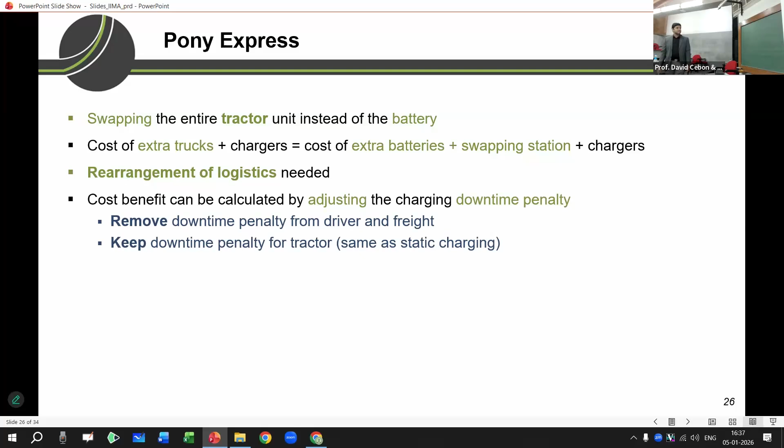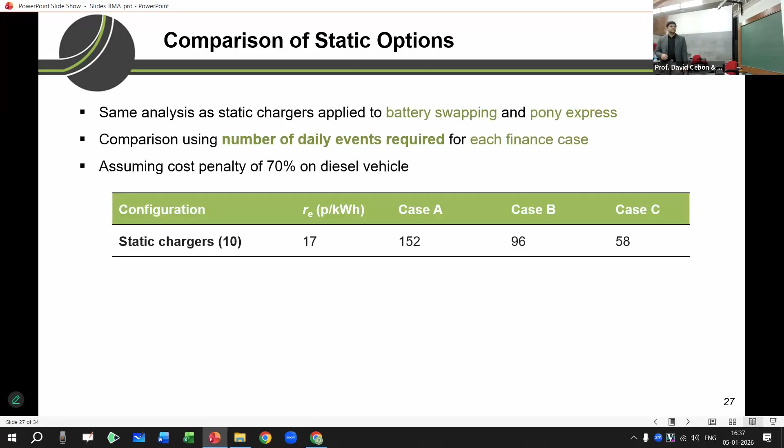Now, if we just compare these using the same analysis and look at the number of charging events or swapping events you need per day for the same finance cases, assuming the same 70% cost penalty over the diesel vehicle, we can see that for static chargers, if you had 10 static chargers, you get a certain number of minimum required charging events per day for the different finance cases. It gets lower as you go along because that's the more relaxed finance case. You can look at what if I put fewer chargers in. That makes it a bit better because you don't spend as much on the capital cost.

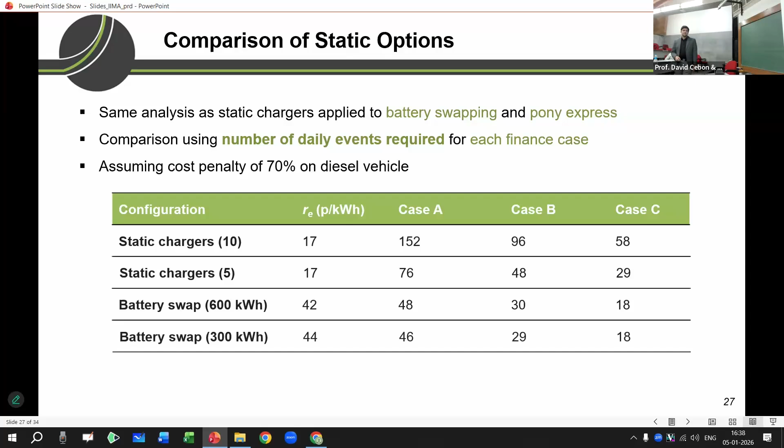We can then compare battery swapping to it. Battery swapping with 600 kilowatt hour batteries is a bit better than static charging. It looks better here, but that's not accounting for the queuing issues and the interoperability issues and so on. Battery swapping with smaller batteries looks pretty similar to the larger battery case, no significant advantage. Whereas Pony Express is, again, a bit cheaper than battery swapping. By cheaper, I mean it requires fewer events to achieve the same finance case. So it's a sort of win-win situation because there's no queuing issues, you get better finance scenarios, and you don't have to build a complex swapping station with all that expensive equipment. So that's another important conclusion apart from the ERS one.

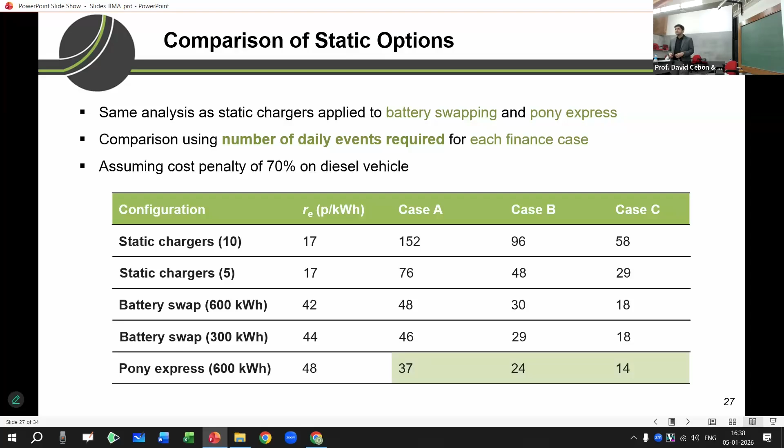Now, very quickly, what happens with technology improvement? That was a question that was just raised: what happens as batteries get better and better? Will ERS returns diminish? So we tried to look at that by looking at the estimated decrease in the cost of a battery pack over the years, and the estimated decrease in the cost of the electric vehicle, excluding the battery. So we assume that would also decrease, not just the cost of the battery pack. And battery weight would also decrease. By that, I mean the energy density would increase over the years.

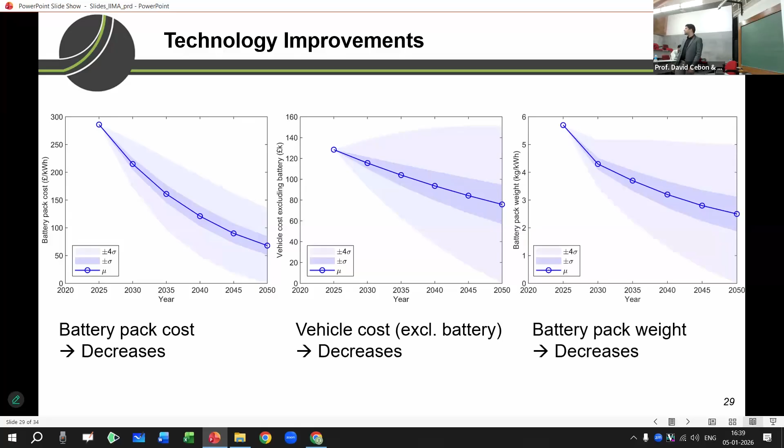So these are the assumptions we made. Of course, there's an uncertainty band because we cannot predict the future. But we use that and sort of try and predict how vehicle costs would change. And we do that in terms of the total cost of logistics.

So some assumptions: we look at journey lengths from 10 kilometers to 800 kilometers and take the average. We assume a payload requirement of 29 tons. That's what you carry right now. That's what you want to be able to carry in the future. And all the costs are in current pounds. So don't worry if you don't see the diesel costs going up, because there's no inflation accounted for. It's just in current money. That's what that looks like.

So the x-axis is the year. Y-axis is the cost of logistics with respect to diesel. So again, diesel is at 1. The blue curve here, that's for a battery electric truck that has the same battery capacity as today. That's 600 kilowatt hours. And if you maintain the same battery capacity, the range will be the same, but the weight will reduce, so you can carry more in the back of the truck.

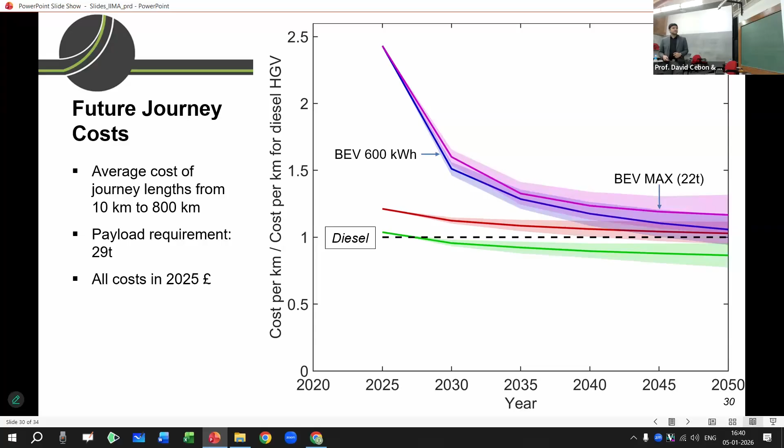There's another scenario, which is that as batteries get lighter, you might want to maximize your battery capacity to get more range out of the truck while keeping the same payload capacity as current electric trucks, which is 22 tons. So that's another scenario. And then this is a scenario of a hybrid range extended vehicle if you had a small engine on board to power the vehicle when it runs out of battery. And this is the ERS vehicle with a small 250 kilowatt hour battery.

So what we see right away is that the ERS vehicle becomes cheaper than diesel sometime between now and 2030. And it remains cheaper, and by a huge margin. So we saw that the profit margins of logistics companies are like 3 to 5%. So it's well below that. And so you can charge a tax on it as well. All the others are higher than diesel.

And it's important to note that in the UK, at least, there's going to be a ban on sale of IC engine trucks from the year 2040. And none of these are cheaper than diesel at that point. So there's going to be no push to switch to them, which means that there will have to be subsidies. The government will lose a lot of money. And then even after that, people will still face the same issues.

So the payload penalty and the charging downtime penalty, these two penalties will still remain even if you had much better batteries than now. And that's based on our predictions. And of course, the grid connection issue gets worse. As David mentioned, you need even larger grid connections to charge these massive batteries. Right, that's the 2040 year.

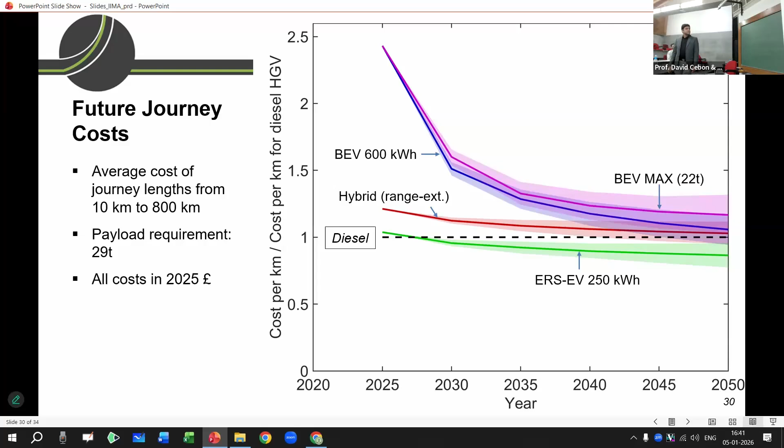Cool. So just to conclude, we looked at a metric called the total logistics cost or total cost of logistics, which considers the payload and cost penalties, which are both significant issues. So it's better than just using the TCO. We saw that the ERS is profitable, with a cheaper cost of logistics than diesel and leaving room for government tax. We saw that even with technology improvement, the benefits of ERS will still be quite significant.

Where it's not possible, we saw that among the other options, Pony Express or tractor swapping, or I think in India you call it a horse. So swapping the horse would be the best solution, of course, with some considerations around re-engineering logistics. If there's no chargers at all, then you need to use a range extended hybrid vehicle where you can use biofuel. At the very start, David said that there's not enough biofuels to power the whole trucking industry. We can use them in scenarios where there's no charging possible, and that would be very few scenarios.

In terms of what to do next, we want to do more specific case studies. We need a lot of data for that. We got some data for the UK, which is why we show UK results. But getting data from other countries is quite difficult, and that's something on our radar. We want to develop some more complex models. So we started with simple models to understand the problem. Now that we have an understanding, we can go on to more complex models. And we want to look at weights and dimensions changes to try and solve the payload penalty issue. And of course, look at this in different countries as well.

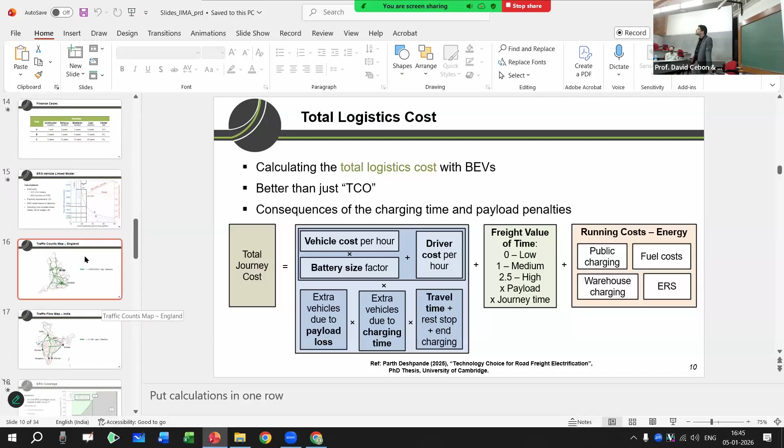Also, the map route. I just wonder. The England one or the India one? England. Okay. So these are actually the electric chargers, right? So I wonder how it actually works. If one of the roadways is blocked, can we detour? If you're using electric roads, you mean? Yeah, especially in a natural disaster, if that road is blocked, what else can we do?

In terms of resilience, electric roads are much better than charging because, first of all, there are fewer grid connections, so it's a much easier system to take care of in the case of natural disasters. In terms of flexibility, the ERS is very modular. If one section is damaged or switched off, you can just not use that bit. You could also detour, but even if it's switched off, you could just continue along the same road. You could retract your pantograph.

For example, if you have an in-road ERS and there's snow on the road, you just switch off a little section of it. You still have a small onboard battery, a 250 kilowatt hour battery, that can take you over that section, or along a detour route, and then you can join back on the ERS. And the pickup is also retractable for all kinds of ERS. Okay, thank you so much.

Yeah. So we have some questions from the online participants. The questions are addressed towards both of you, so either of you can answer. No, we don't. We only have one. What is it?